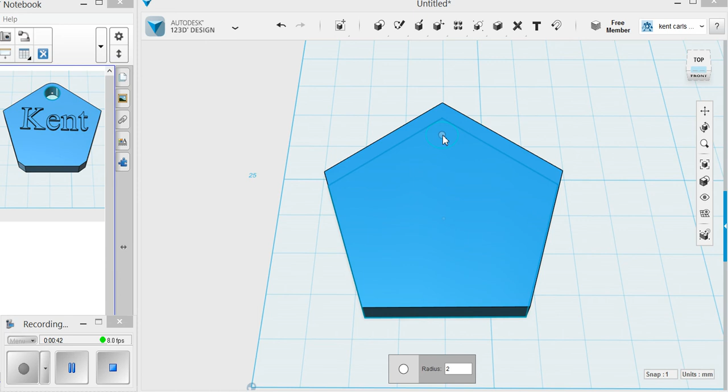So to put the hole on there, you're going to go back up to your primitives bar up here, and you go to circle. You can see you can place your circle anywhere, but we're not ready to place it yet. You go down and look at the radius. We're going to put a radius of 2, so that means it's going to be 4 millimeters across, and that would be plenty of room to get any key ring through that.

So once you have it, you're going to place it approximately where you think you want it, and that's going to be pretty close. Once you have it on there, you're going to click in an area so that it becomes shaded.

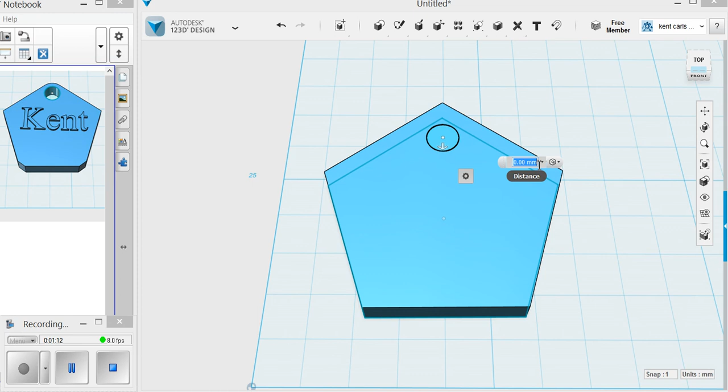Then we're going to click on this, and we're going to go to extrude. Now you see the arrows pointing down, that means it's going to extrude downwards, so we're going to put in a value of 3 because that's how much we put in for our height. We put a value of 3. You push enter, and you can see you've got a hole all the way through it. So if you look from the bottom, you can see right through it.

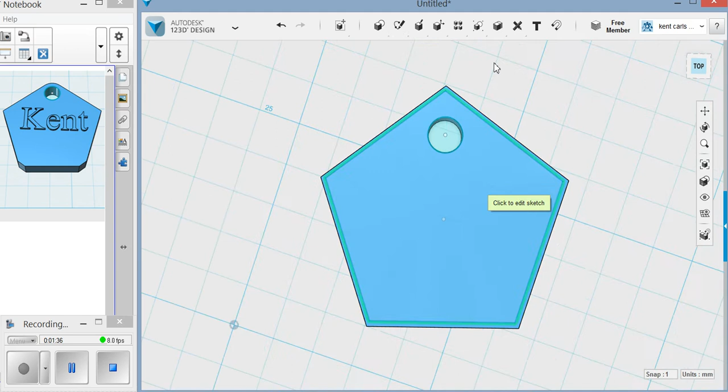So that's for the hole. Now the text, you go up to the top and you click text. It's going to say click to edit sketch, and then specify text position. Now it's going to come up on a weird angle, don't worry about that too much, we can change that. So in here you type whatever text you want. I'm going to type Kent.

Please don't type in a swear word or anything like that where I wouldn't let you print it. But if you wanted to put a nickname in, you could.

Now, if you want to change the size of your text, you would just change the height, so you would change it to 5.00 or whatever, just so that it can fit on there. Okay, so I'm going to leave mine at 10 because it fit pretty well, since I only have 4 letters in my name, so that's pretty easy.

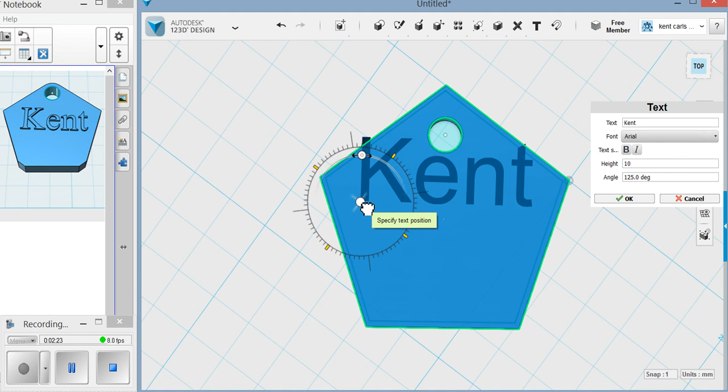Now the angle, you can just rotate this, probably make it level, and then to move it, you just click in the middle there, and you can just put it wherever you want. You can choose different text, like different fonts, sorry.

So I can choose this one here, it might make it look slightly different. One thing I'll caution you about, if you choose one that's weird, like this one here with all these different styles, it looks kind of neat, but when you extrude it later on, it's not going to work properly. So just choose one that's kind of normal, like Arial or something.

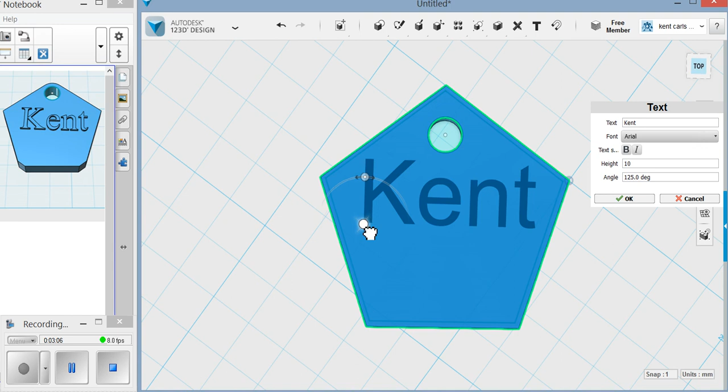Place it where you want, and then you hit enter. So now that text, it wouldn't really show up when you 3D print it, so you want to make it 3-dimensional, so you click on it, like click on a letter somewhere, and it comes up orange.

You can edit the text if you want to change what it says, you can move it around, but what we want to do is extrude it. So now notice it's going to extrude upwards, because that's what we want. We want it to come out of it.

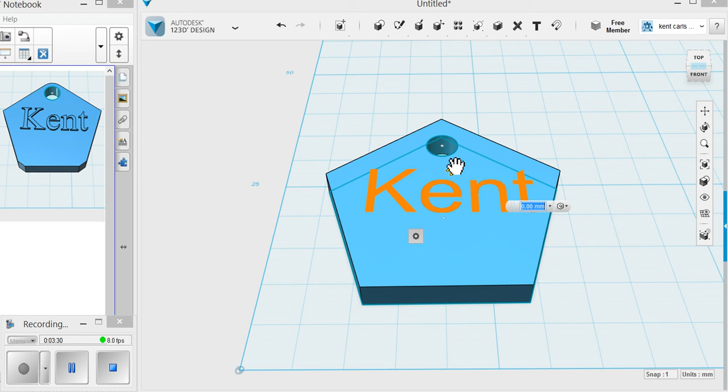And we could put like 1 millimeter, that would be lots of extrusion. If you wanted, you could do 1.5 or 2. Just the more you have, the easier those letters can break off, so I'd stick with 1 or 1.5. I'm going to go back to 1 and hit enter.

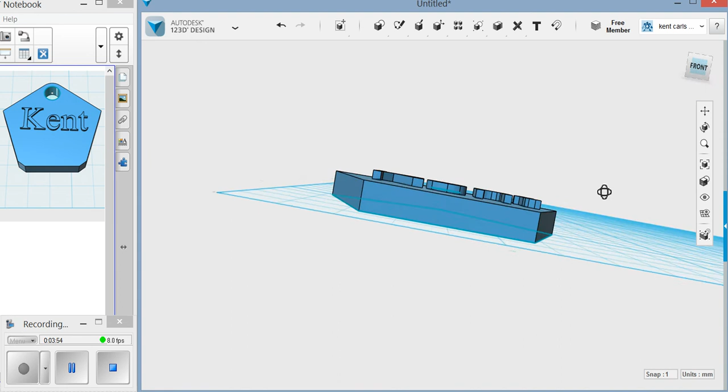And now you've got a keychain with your name on it and a hole in it. So in the next video, we'll look at how we modify that to make it look a little bit different.